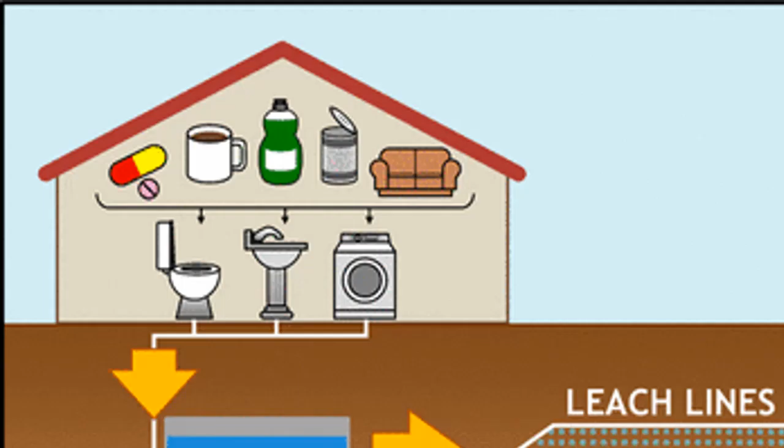Septic tank problems, effectiveness, viruses and bacteria in the septic tank. The issue mentioned above is analogous to a combination of the following inquiries.

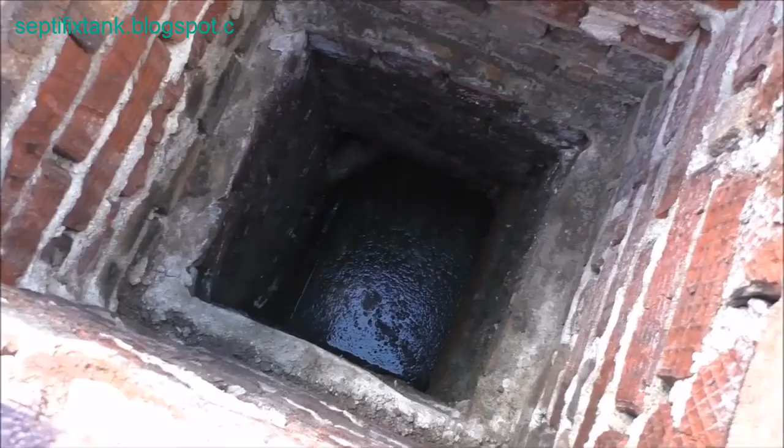Does septic tank yeast produce viruses and bacteria? Is septic tank treatment effective? What are bacteria and viruses in a septic tank? Do bacteria and viruses aid in the decomposition of the septic tank? If there are no viruses, why can septic tanks transmit diseases? Does the sump treatment additive harm the pipes and concrete of the tank? And does it affect the soil and groundwater?

All will be addressed and explained below. Additives for treating septic tanks for the environment and home structure.

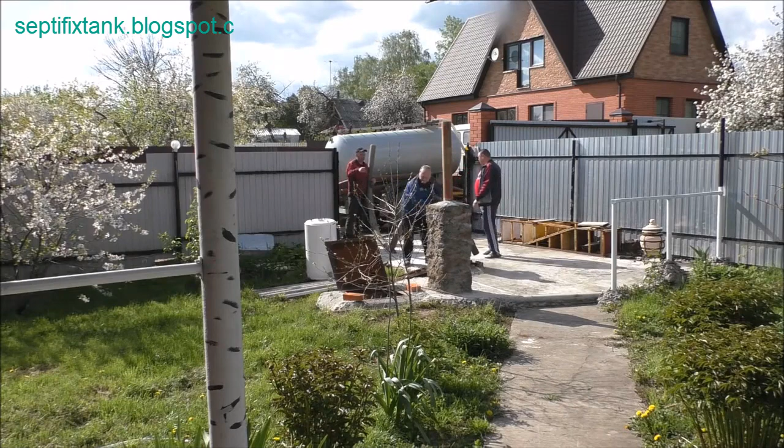Enzymes are truly effective when they consist of a combination of chemicals that do not harm water pipes, concrete, and contaminate groundwater. The process of dissolving septic tank treatment additives into water can be divided into several stages. The final stage yields residues from the chemical reaction. These residues will enter groundwater and subsequently damage the groundwater system.

What constitutes a truly effective septic tank additive? Thus, the phosphate-breaking additive must be a chemical that only decomposes organic matter and some inorganic substances in the tank, without damaging the concrete and pipes. Residues after the reaction process must be non-toxic to the soil and groundwater environment.

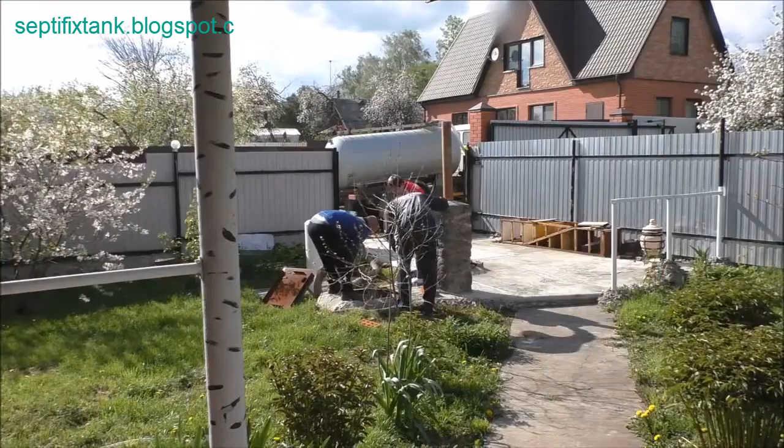Please refer to the next section. Septic tank additives and pathogenic bacteria and viruses.

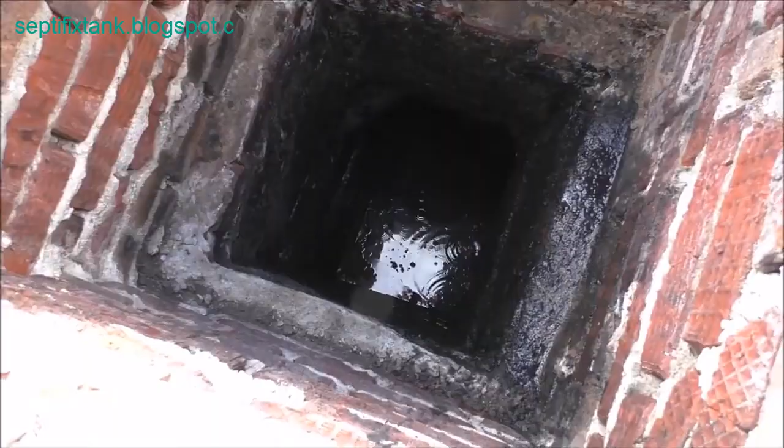Enzymes for treating septic tanks, which involve very potent chemicals in terms of solid decomposition, have an immediate effect by aerating and cleaning the septic tank. However, in the long run, the technical structure of the standard septic tank holds greater significance.

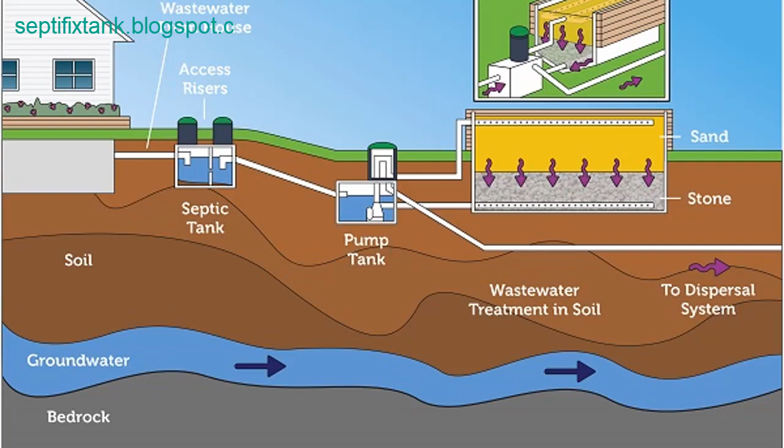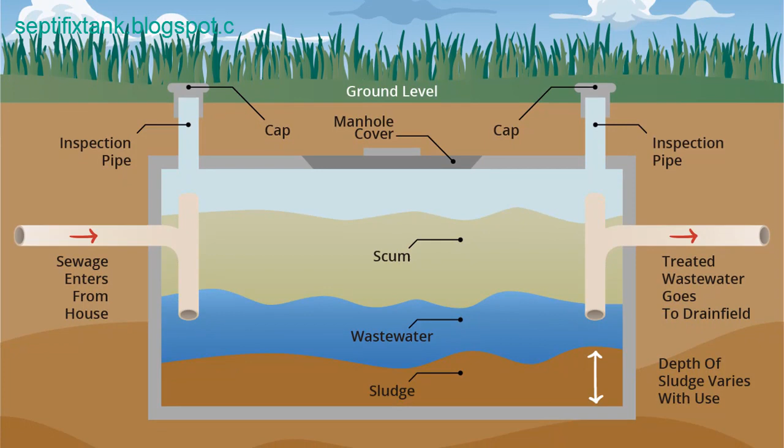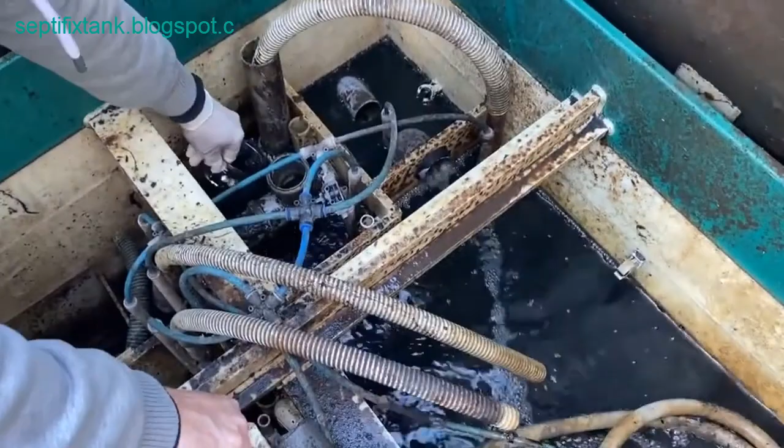This discovery was made by Luc Montagnier, who won the Nobel Prize in 2008. Despite formulating a theory about viruses, he was compelled to conform to his superiors' directives. He was prohibited from revealing the actual nature of the virus.

In 2009, Montagnier and his collaborators published a paper titled Electromagnetic Signals are Produced by Aqueous Nanostructures Derived from Bacterial DNA Sequences, wherein they documented that bacterial DNA can generate an electromagnetic signal, EMS, transferred through the cell culture medium.

Conclusion. The utilization of septic tank additives is deemed unfavorable due to scientific findings. Septic additives do not create bacteria or viruses to break down organic matter. There is no substantiated evidence that bacteria are responsible for decomposition.

Moreover, environmental pollution, including soil and groundwater pollution, is also highlighted as a subsequent concern. The issue of viruses and bacteria, in actuality, does not hold validity. Consequently, very few individuals possess knowledge about it.

The suppression of the signal, labeled as a virus, which contains detrimental information leading to illnesses, necessitates special additives. This discovery has been made by scientists outside of academia who do not conform to dogma, unlike those within the scientific establishment driven by technological monopolies.

As a result, research on tablets is adequate for eliminating the so-called bacteria and viruses in the septic tank. Additionally, the decomposition of organic solids within the tank can be accomplished within a 1-month period, without causing environmental pollution.

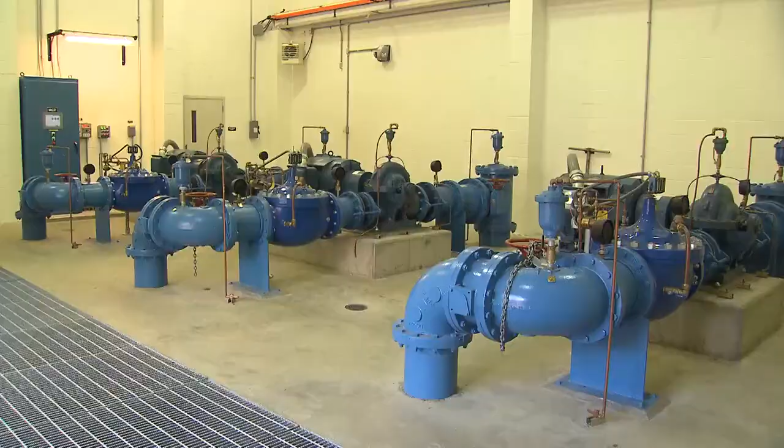We are fortunate in Clark County to have a plentiful natural resource. It's water. While we can see these streams and water bodies throughout the county, it is what trickles down and collects under the surface that supports our day-to-day life, and that is groundwater.

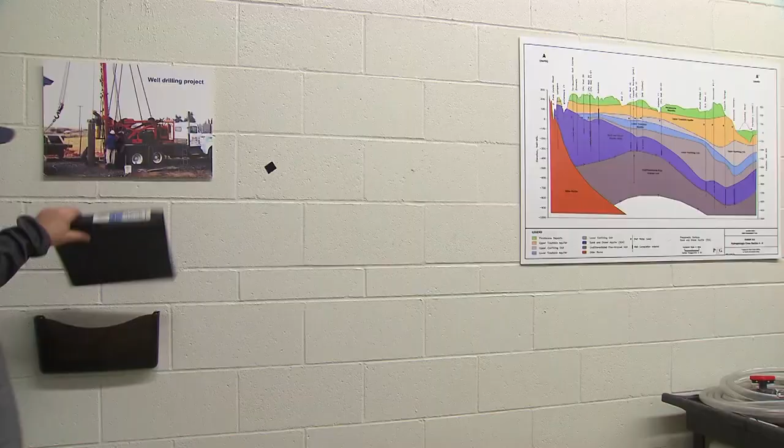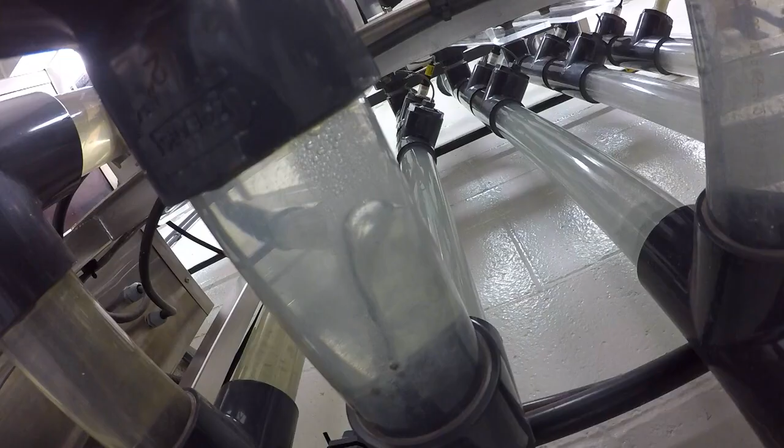98% of the drinking water that everyone in Clark County drinks comes from groundwater. That includes individual wells serving single homes, small public water system wells serving 2 to 14 homes or small businesses, and extends to the larger municipal wells. Public suppliers deliver drinking water from deep underground wells or aquifers to customers in the urban areas of Clark County.

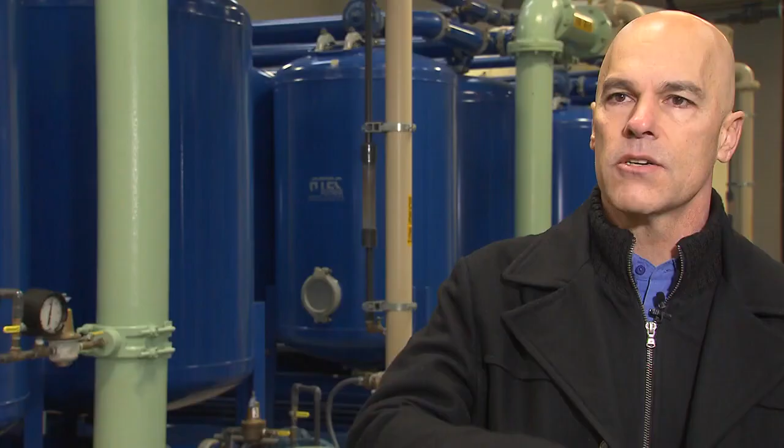Relative to surface water, groundwater is protected by Mother Nature beautifully. It's placed under layers and layers and layers of earth. The water we're pulling off of this site is 600 feet below the surface. The last time the water we're pulling saw surface was decades to centuries ago.

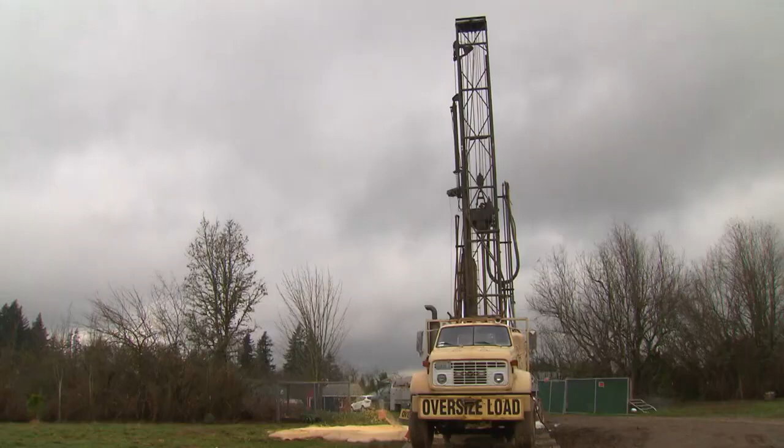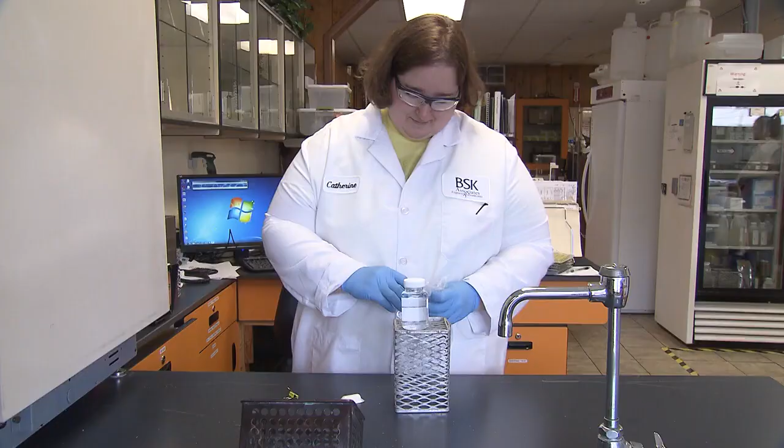Because some human activities could affect groundwater, regulations were put in place to protect this valuable resource. In 1971, the legislature passed the Water Well Construction Act. In that, they found that the construction, operation, and maintenance of wells was of vital interest to public health, well-being of the community, and overall public safety.

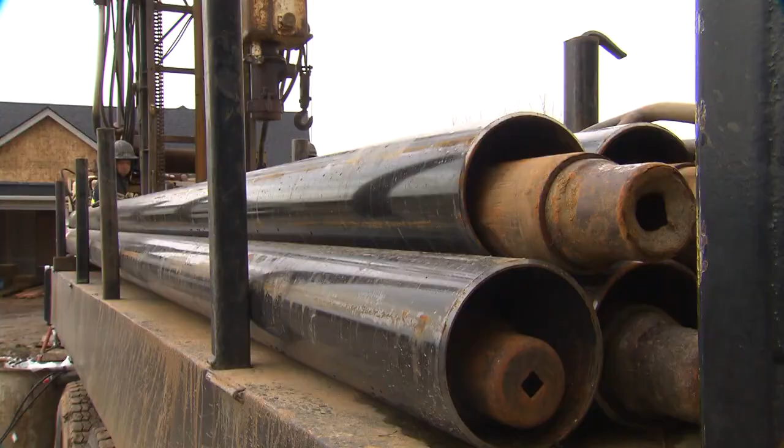On a local level, Clark County Public Health works with well drillers, developers, and rural property owners to ensure new wells are constructed to standards and water from the well is safe for drinking.

Our drinking water program touches on drinking water in a couple of different ways. For new well construction, we do a well site evaluation, and that allows us to help property owners ensure that the location they want to have their well constructed is free and clear of contaminants within at least 100 feet.

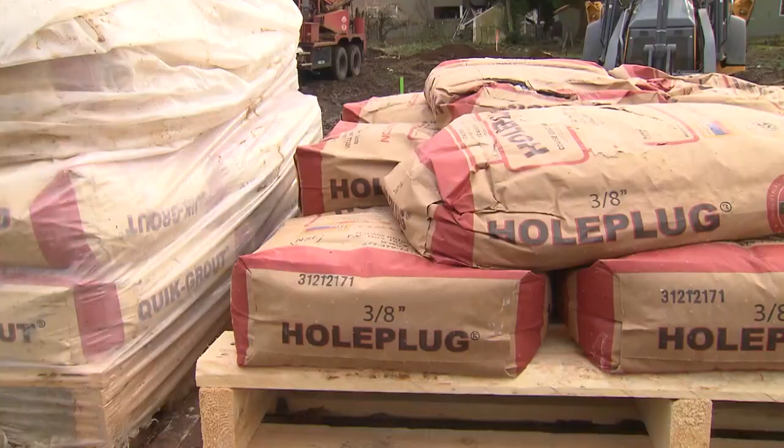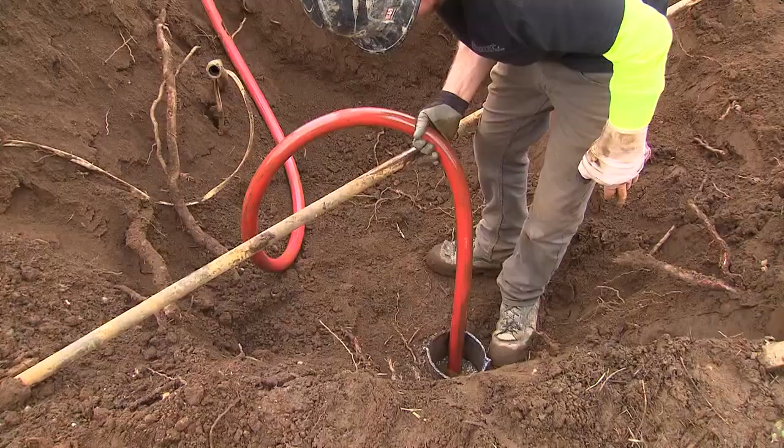Potential sources of contamination include septic systems, both the tanks and the drain fields, underground storage tanks, livestock barns, manure piles, things like that. To avoid possible groundwater contamination, a well no longer in use needs to be properly capped or decommissioned. The county has been documenting new, known, and decommissioned wells into a database since the 1980s.

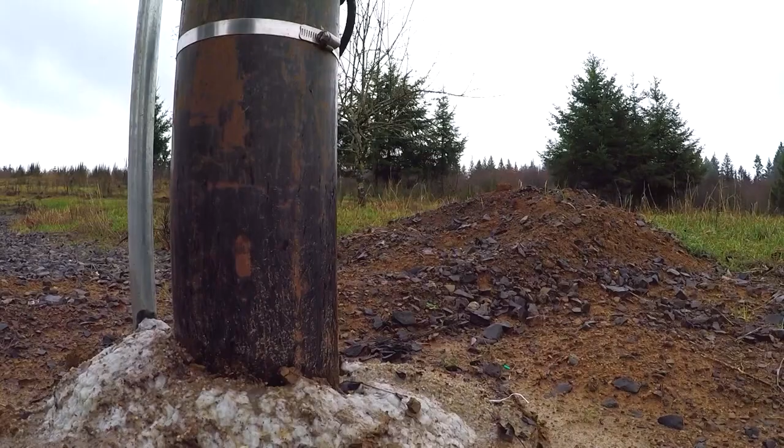If a property owner then needs to get a building permit, we do a review of both the well construction and the water quality. So we can combine what has been established during the well site evaluation, what the well driller's done, and we look at the water quality for bacteria, nitrate, and arsenic in most cases, and say that the water system provides adequate water quantity for a home.

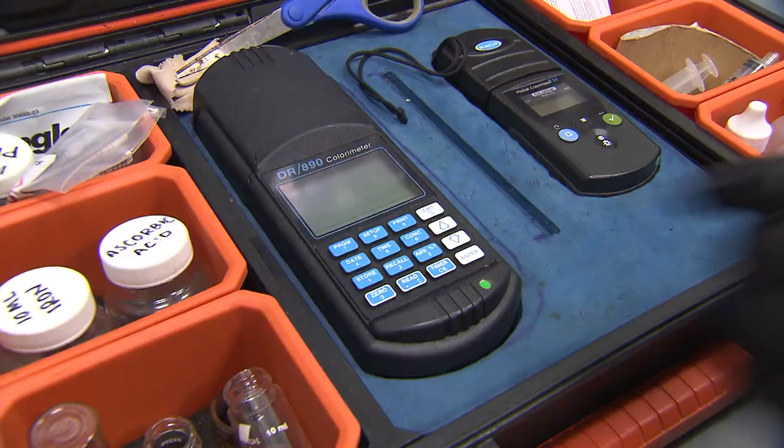Once a well is approved, it is the property owner's responsibility to maintain the water system. Unlike public water providers, there is no county oversight to monitoring private wells.

Clark Public Utilities pulls over 2,000 samples every year to ensure that the water is clean and pure, and we test for about 166 elements that exist in nature—iron, manganese, all sorts of inorganic and organic compounds. It is an extensive battery, and we're testing all the way down to parts per trillion.

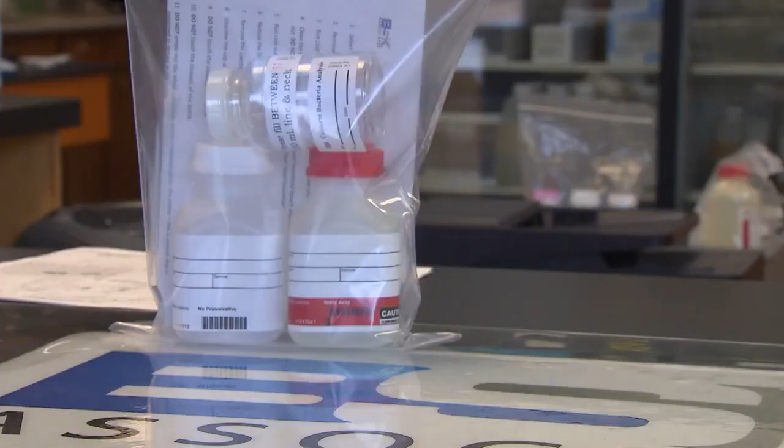Public health recommends that private wells be tested for bacteria once a year and nitrates every 3 years. Many wells in Clark County have not been evaluated for arsenic, but should be at least once.

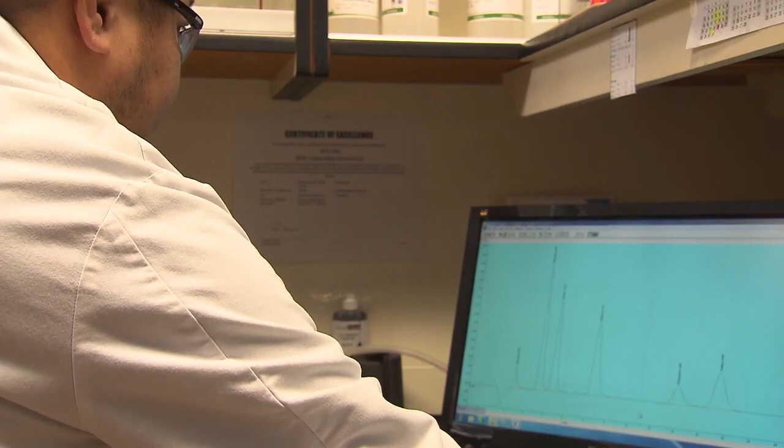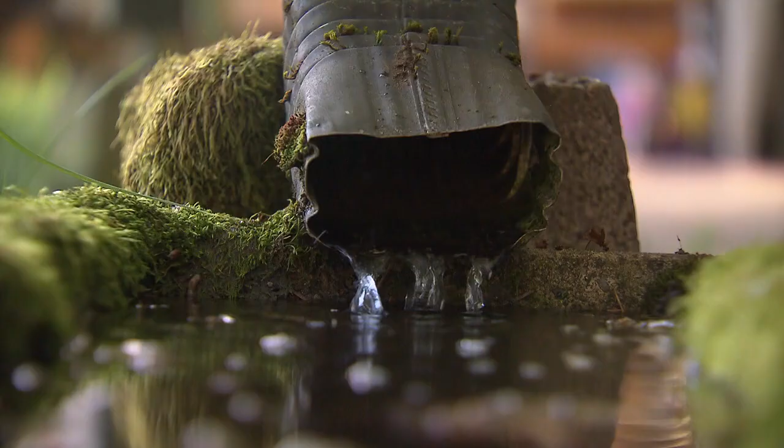National Groundwater Awareness Week is March 11th through the 18th. There are things we all can do to protect our groundwater. These include routine septic system inspections, properly disposing of household hazardous materials such as used motor oil and unused pesticides and herbicides, and helping to recharge aquifers by allowing stormwater from your home to go back into the ground.

For more information on groundwater, visit the Clark County Public Health webpage at clark.wa.gov/publichealth, drinking water and wells.

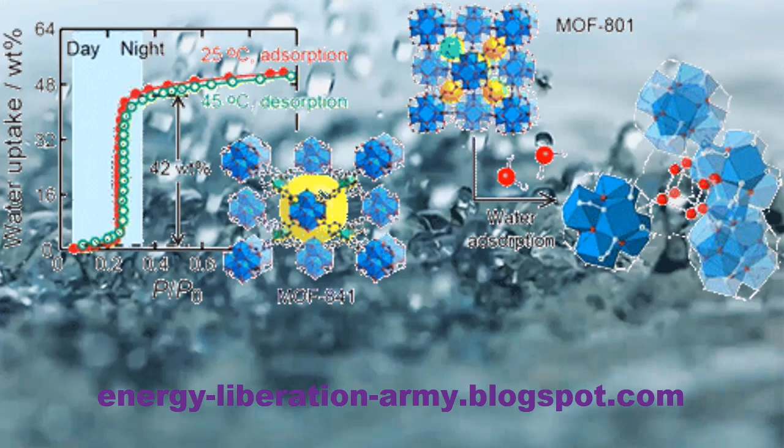That's the real secret. What you may not realize is just how efficient such a simple innovative system is, as it eliminates the need of buying expensive bottled water or going through the hassle of drilling a new well. Thanks to this breakthrough technology, you can now literally drink from the enormous lakes in the air. The water is purified, and the unique system can produce up to 30 gallons of clean, fresh water a day, and you won't have to worry about all the nasty chemicals ever again. The fundamentals are so easy, and if properly applied, you can have a virtually unlimited water supply anywhere, even if you live in the desert.